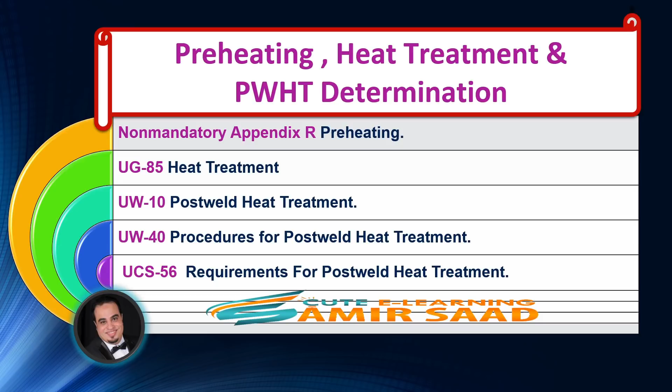In this lecture, we will discuss preheating, heat treatment, and PWHT determination as per the following referenced code paragraph: Non-mandatory Appendix R, Preheating.

Introduction. Preheating may be employed during welding to assist in completion of the welded joint. The need for and temperature of preheat are dependent on a number of factors, such as the chemical analysis, degree of restraint of the parts being joined, elevated physical properties, and heavy thicknesses.

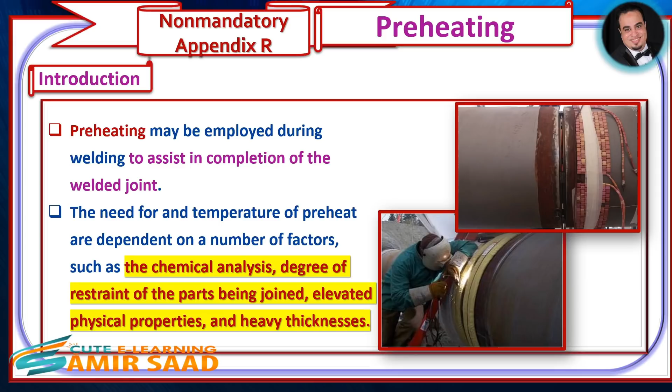Mandatory rules for preheating are, therefore, not given in ASME VIII Div.1, except as required in the general notes that provide for exemptions to post-weld heat treatment, in tables UCS 56.1 through UCS 56.11, and tables UHA 32.1 through UHA 32.7.

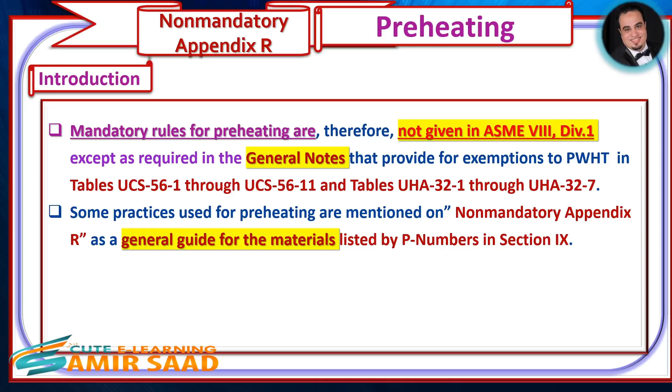Some practices used for preheating are mentioned in Non-Mandatory Appendix R, as a general guide for the materials listed by P numbers in Section 9.

The procedure specification for the material being welded specifies the minimum preheating requirements, under Section 9 Weld Procedure Qualification Requirements.

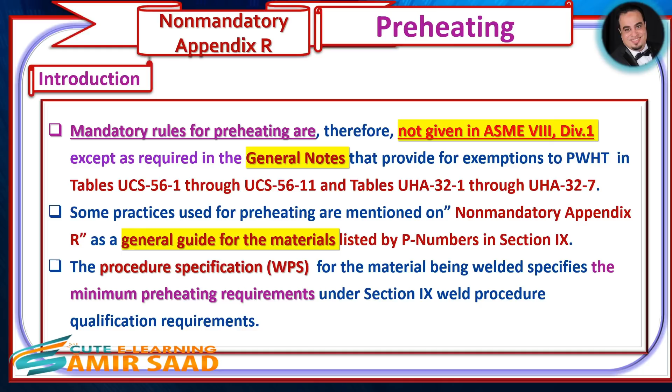The heat of welding may assist in maintaining preheat temperatures after the start of welding, and for inspection purposes, temperature checks can be made near the weld.

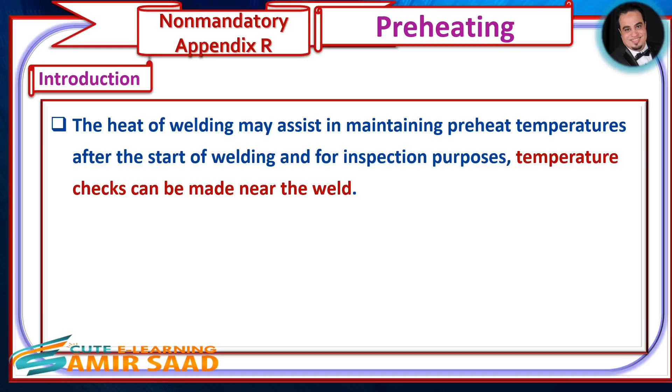Normally, when materials of two different P number groups are joined by welding, the preheat used will be that of the material with the higher preheat specified on the procedure specification.

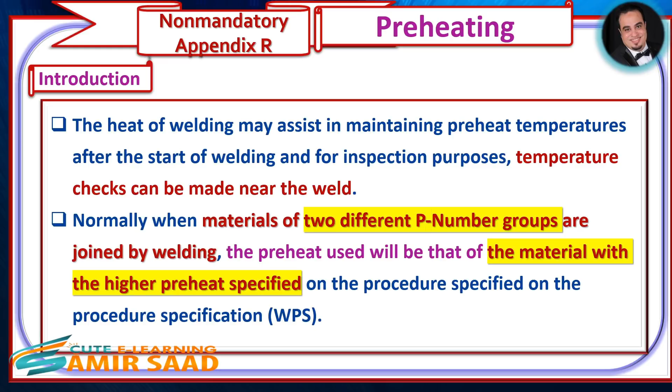The minimum preheat temperatures for materials of various P number groups, from P number 1 through P number 15E, are given as per Non-Mandatory Appendix R, Preheating.

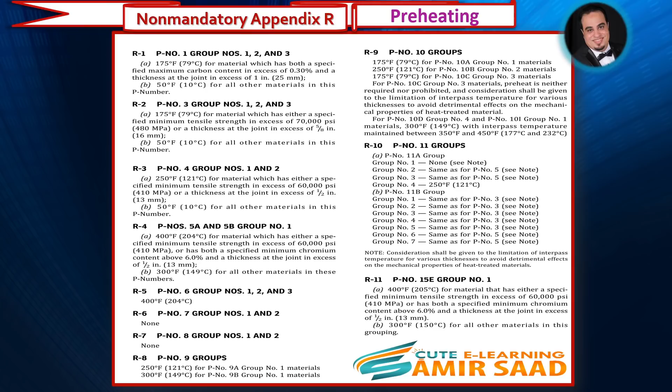Example 1. What is the recommended minimum preheating temperature in the construction of a new pressure vessel made from P number 1 Group 3 material that has a nominal thickness of 1.75 inches and carbon content of 0.35%?

Example 2. What is the recommended minimum preheating temperature in the construction of a new pressure vessel made from P number 9B Group number 1 material that has a nominal thickness of 0.5 inch?

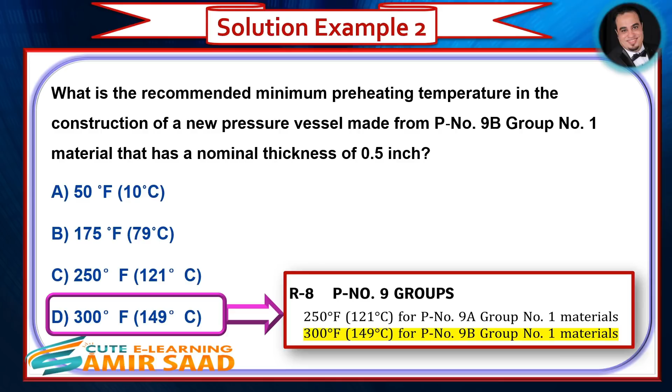UG85 Heat Treatment. When plate specification heat treatments are not performed by the material manufacturer, they shall be performed by, or be under the control of, the manufacturer, who shall then place the letter T following the letter G in the mill plate marking, to indicate that the heat treatments required by the material specification have been performed.

The manufacturer shall also document in accordance with UG 93B that the specified heat treatment has been performed. UCS 85, UHT 5E, and UHT 81 provide requirements for heat treatment of test specimens.

UW10 Post-weld heat treatment, PWHT. Pressure vessels and pressure vessel parts shall be post-weld heat treated as prescribed in UW40, when post-weld heat treatment is required in the applicable part of subsection C.

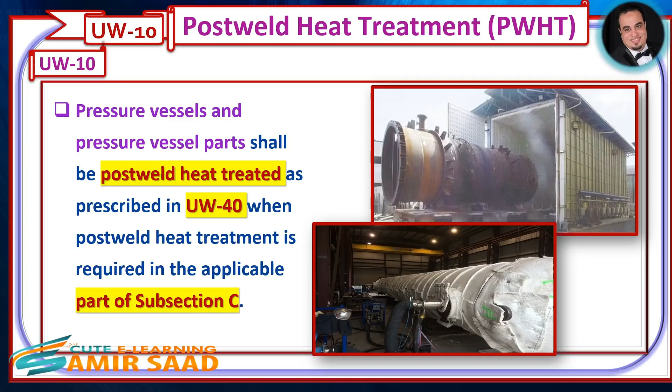UW40 Procedures for post-weld heat treatment. UW40A, PWHT soak band. As a minimum, the soak band shall contain the weld, heat-affected zone, and a portion of base metal adjacent to the weld being heat-treated.

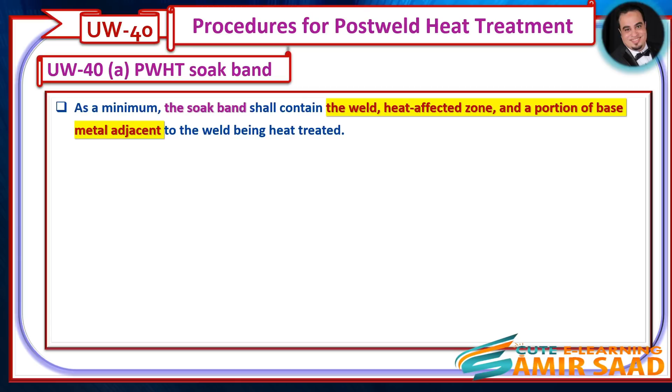The minimum width of soak band is the widest width of weld plus 1T or 2 inches, whichever is less, on each side or end of the weld, as illustrated in the below figure.

Please note that the term T equals the nominal thickness of the weld at the point of attachment, as per UW40, F.

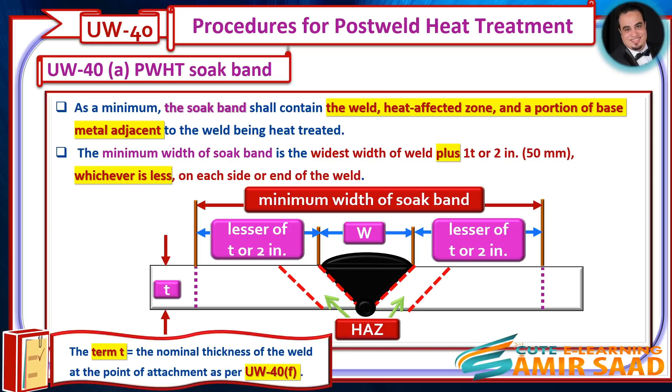Example: what is the total minimum width of a PWHT soak band in the construction of a new pressure vessel that has a nominal thickness of 1 inch, a maximum weld width of 0.5 inch, and made from P5A material?

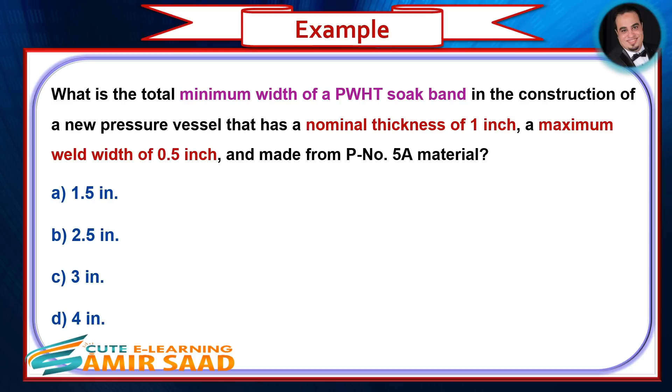Solution: the given information. Nominal thickness equals 1 inch, maximum weld width equals 0.5 inch. Task: minimum width of PWHT soak band.

Solution: the minimum width of soak band is the widest width of weld plus 1T or 2 inches, whichever is less, on each side or end of the weld. So, the answer is B, 2.5 inches.

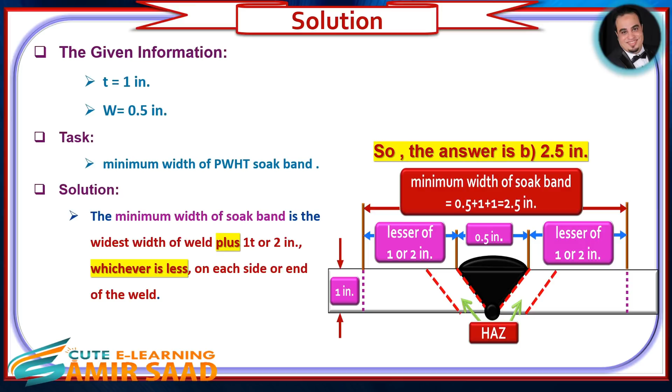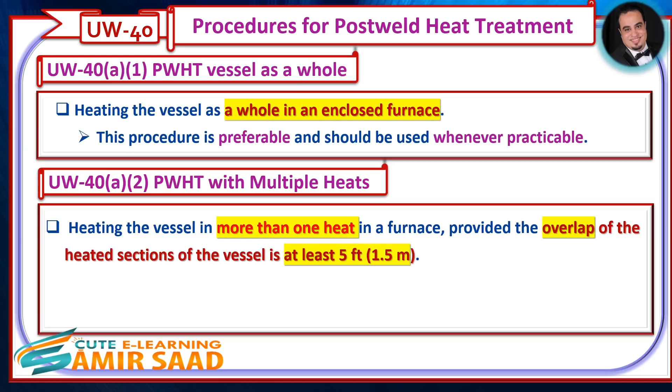UW40A2, PWHT with multiple heats: heating the vessel in more than one heat in a furnace, provided the overlap of the heated sections of the vessel is at least 5 feet. When this procedure is used, the portion outside of the furnace shall be shielded so that the temperature gradient is not harmful.

UW40F, the term nominal thickness. The term nominal thickness is used in tables UCS 56.1 through UCS 56.11, UHA 32.1 through UHA 32.7, and UHT 56, and is the thickness of the welded joint as defined below.

UW40F1. When the welded joint connects parts of the same thickness, using a full penetration butt weld, the nominal thickness is the total depth of the weld exclusive of any permitted weld reinforcement.

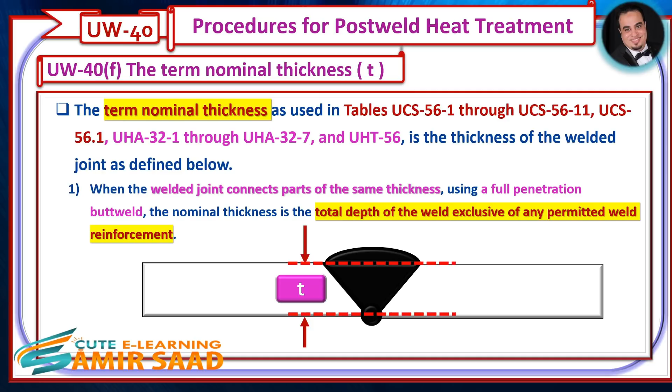UW40F2. For groove welds, the nominal thickness is the depth of the groove.

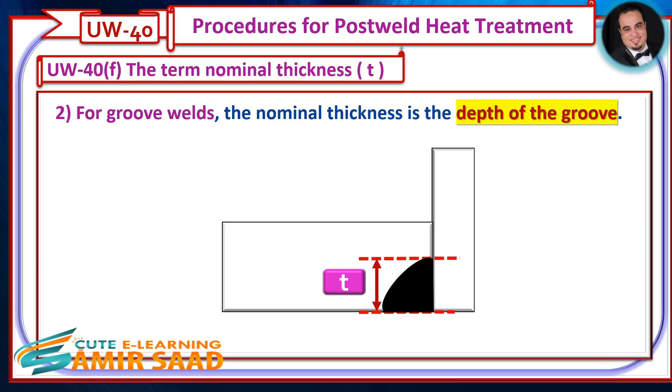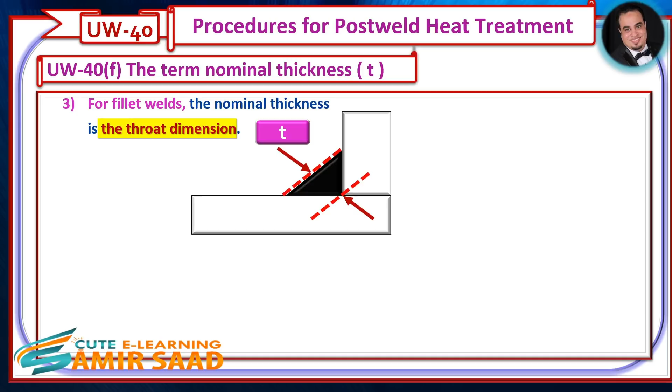UW40F3. For fillet welds, the nominal thickness is the throat dimension. If a fillet weld is used in conjunction with a groove weld, the nominal thickness is the depth of the groove, or the throat dimension, whichever is greater.

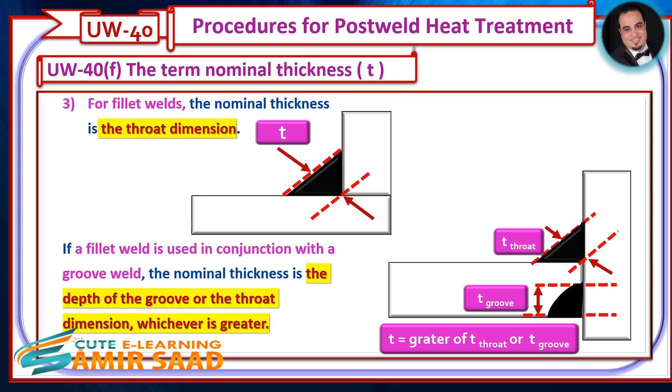UW40F5A. When a welded joint connects parts of unequal thicknesses, the nominal thickness is the thinner of two adjacent welded parts, including head-to-shell connections.

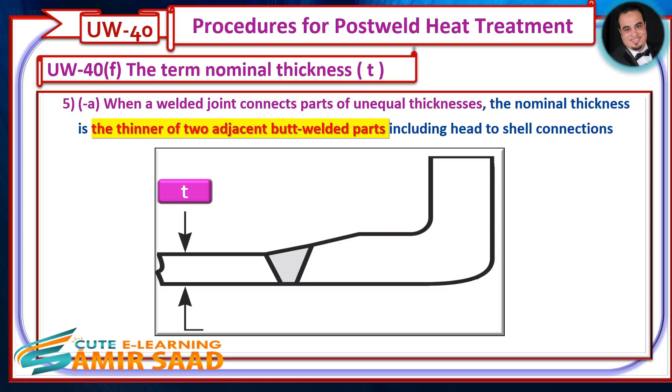UW40F6. For repairs, the nominal thickness is the depth of the repair weld.

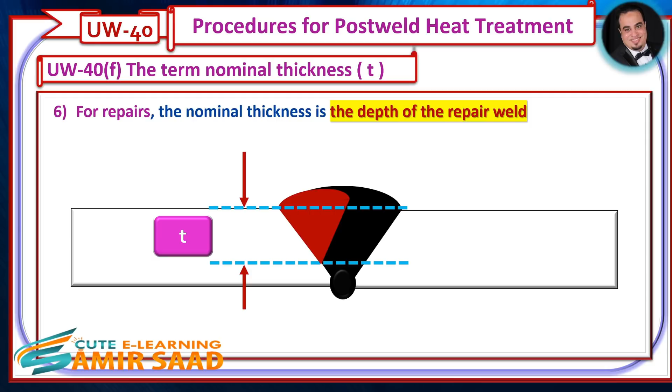UCS 56. Requirements for PWHT. As per UCS 56 D.1, the temperature of the furnace shall not exceed 800 degrees Fahrenheit at the time the vessel or part is placed in it.

Rate of heating shall be not more than 400 degrees Fahrenheit per hour, divided by the maximum metal thickness of the shell or head plate in inches, but in no case more than 400 degrees Fahrenheit per hour.

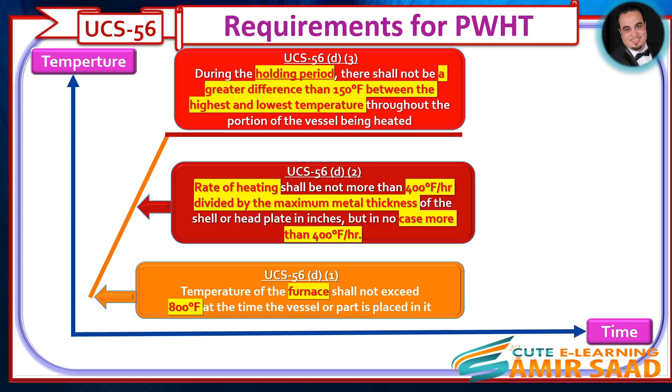As per UCS 56 D.3, during the holding period, there shall not be a greater difference than 150 degrees Fahrenheit between the highest and lowest temperature throughout the portion of the vessel being heated.

As per UCS 56 D.5, rate of cooling shall be not greater than 500 degrees Fahrenheit per hour, divided by the maximum metal thickness of the shell or head plate in inches, but in no case more than 500 degrees Fahrenheit per hour.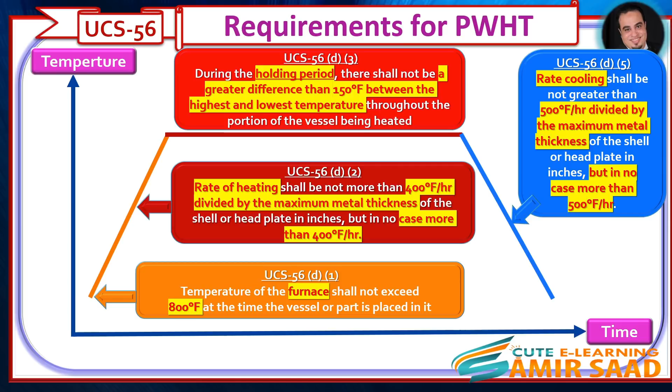From 800 degrees Fahrenheit, the vessel may be cooled in still air. As per EndNote 76, the rates of heating and cooling need not be less than 100 degrees Fahrenheit per hour.

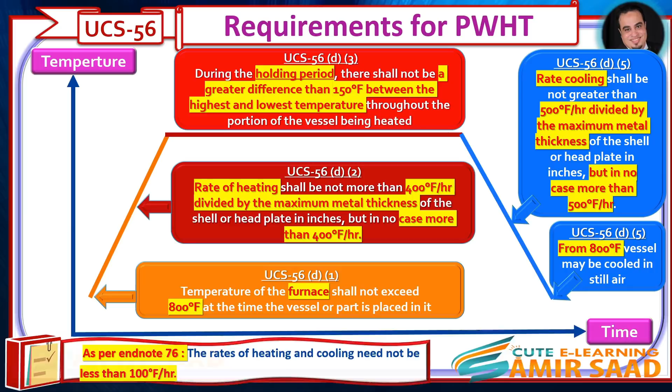During the heating period, there shall not be a greater variation in temperature throughout the portion of the vessel being heated than 250 degrees Fahrenheit, within any 15 feet interval, as illustrated in the figure below.

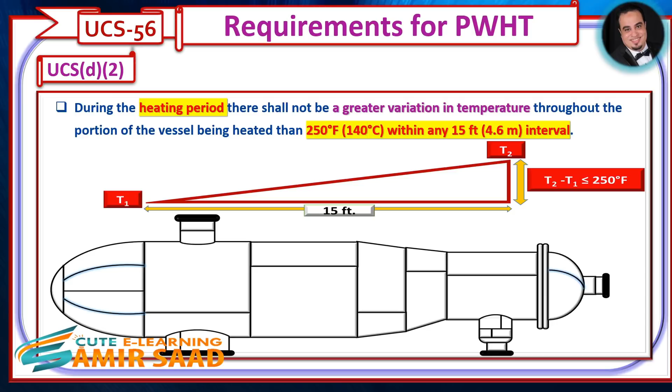Example 1. What is the maximum PWHT rate of heating, above 800 degrees Fahrenheit, when using the furnace heat treatment method and the maximum metal thickness is 2 inches?

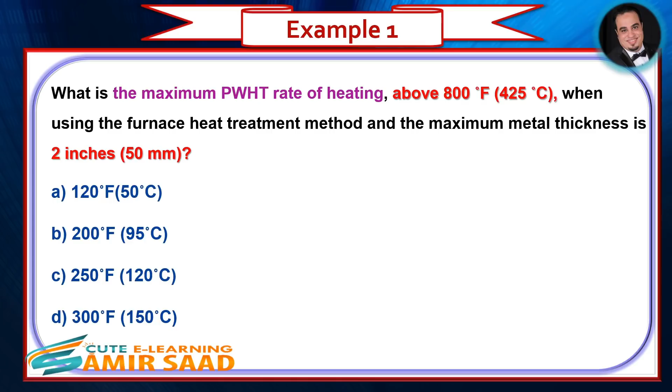Solution Example 1. The given information: maximum metal thickness equals 2 inches. Task: maximum PWHT rate of heating.

Solution. As per UCS 56 D.2, rate of heating shall be not more than 400 degrees Fahrenheit per hour divided by the maximum metal thickness of the shell or head plate in inches, but in no case more than 400 degrees Fahrenheit per hour. Rate of heating equals 400 divided by 2 inches equals 200 degrees Fahrenheit per hour. So, the answer is B, 200 degrees Fahrenheit.

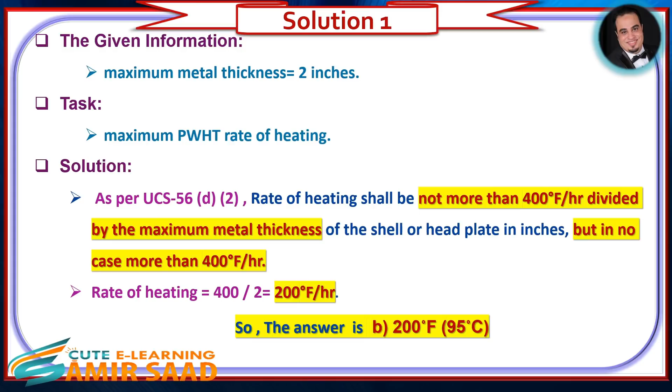Example 2. What is the PWHT rate of cooling, above 800 F, when using the furnace heat treatment method, and the maximum metal thickness is 1.25 inches.

Solution Example 2. The given information: maximum metal thickness equals 1.25 inches. Task: PWHT rate of cooling.

Solution. As per UCS 56 D5, rate of cooling shall be not greater than 500 degrees Fahrenheit per hour, divided by the maximum metal thickness of the shell or head plate in inches, but in no case more than 500 degrees Fahrenheit per hour. Rate of cooling equals 500 divided by 1.25 equals 400 degrees Fahrenheit per hour. So, the answer is D, 400 degrees Fahrenheit per hour.

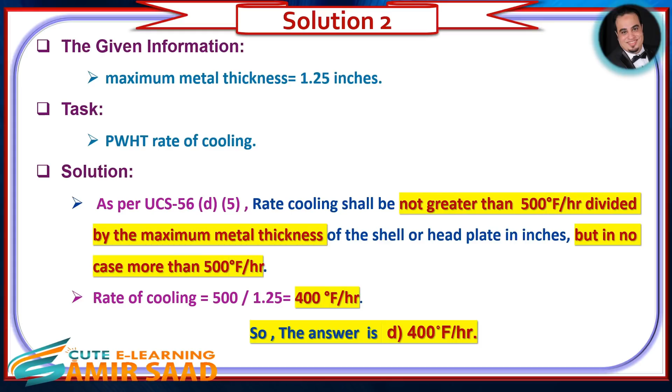UCS 56 and UHA 32. Requirements for PWHT. Table UCS 56-1 through UCS 56-11. PWHT requirements for carbon and low alloy steels include P number 1, 3, 4, 5A, 5B, and 5C, 9A, 9B, 10A, 10B, 10C, and 15E.

Table UCS 56.1. Alternative post-weld heat treatment requirements for carbon and low alloy steels. Table UHA 32.1 through UHA 32.7. Requirements for high alloy steels include P numbers 6, 7-8, 10H, 10I, 10K, and 45.

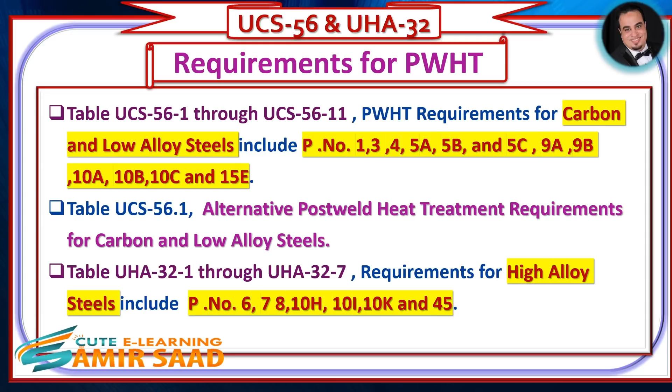Table UCS 56.1. Post-weld heat treatment requirements for carbon and low alloy steels, P number 1. As an example, how to determine post-weld heat treatment: to determine minimum normal holding temperature and minimum holding time, you must know nominal thickness per UW40F, and material P number and group number.

We will discuss the PWHT for nominal thickness 1/16 to 2 inches. Minimum holding time is 1 hour per inch, 15 minutes minimum.

Minimum holding time at normal temperature for nominal thickness 1/16 to 1/4 inch is 15 minutes. Minimum holding time at normal temperature for nominal thickness 1/2 inch is 30 minutes.

Minimum holding time at normal temperature for nominal thickness 3/4 inch is 45 minutes. For nominal thickness 1 inch, it is 1 hour.

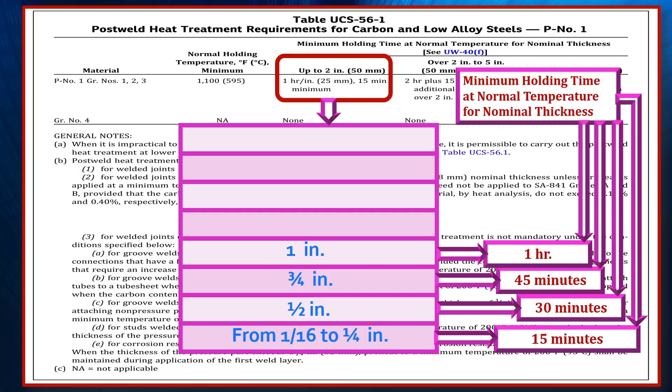Minimum holding time at normal temperature for nominal thickness over 1 1/4 inches, if no preheat applied, is 1 hour 15 minutes. For 1 1/2 inches, 1 hour 30 minutes. For 1 3/4 inches, 1 hour 45 minutes.

Minimum holding time at normal temperature for nominal thickness 2 inches is 2 hours.

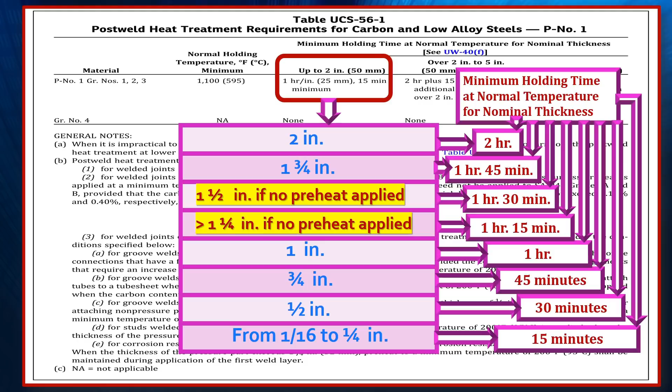Per General Notes B1, post-weld heat treatment is mandatory for welded joints over 1.5 inches nominal thickness.

Per UW2A, when vessels are to contain lethal substances and are fabricated of carbon or low alloy steel, such vessels shall be PWHT per Table UCS 56, unless otherwise exempted by General Note B3 of Table UCS 56-1.

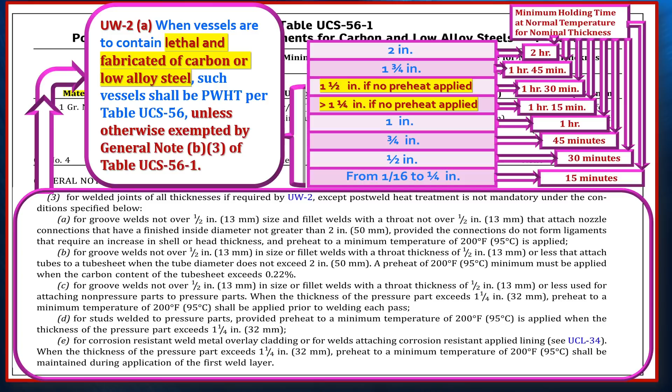Per General Notes B2, post-weld heat treatment is mandatory for welded joints over 1 1/4 inches nominal thickness through 1.5 inches nominal thickness, unless preheat is applied at a minimum temperature of 200 degrees Fahrenheit during welding.

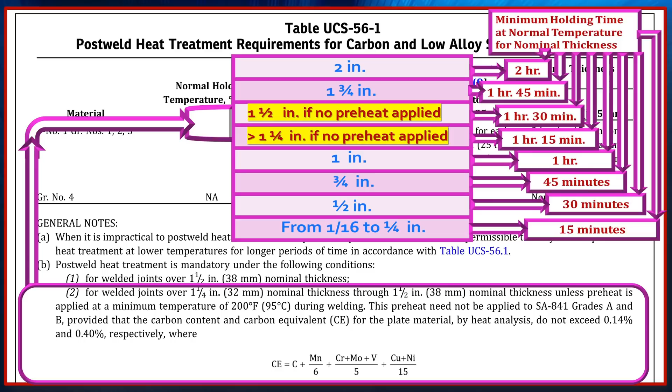Over 2 inches to 5 inches, the PWHT is held for 2 hours for the first 2 inches of thickness, with an additional 15 minutes per inch over 2 inches. Let's look at a graphic of this thickness range.

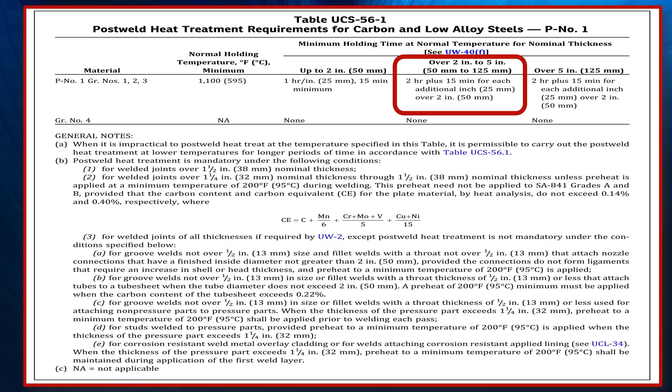Minimum holding time at normal temperature for nominal thickness of 2 inches is 2 hours. For nominal thickness of 3 inches, it is 2 hours 15 minutes.

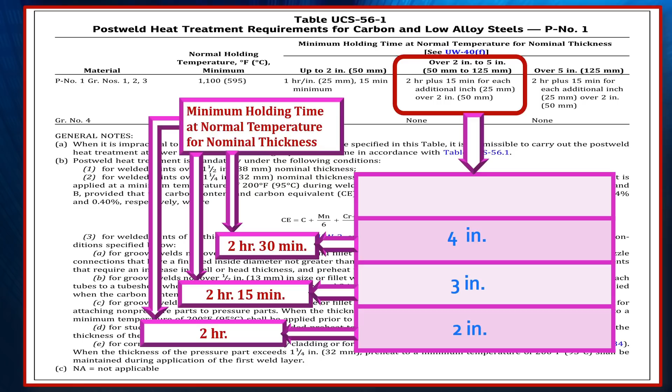For nominal thickness of 4 inches, the minimum holding time is 2 hours 30 minutes. For nominal thickness of 5 inches, it is 2 hours 45 minutes.

Example 1. A vessel is manufactured of SA 516 grade 70 material. What is the required PWHT holding temperature and minimum holding time at normal temperature for nominal thickness of 6 inches?

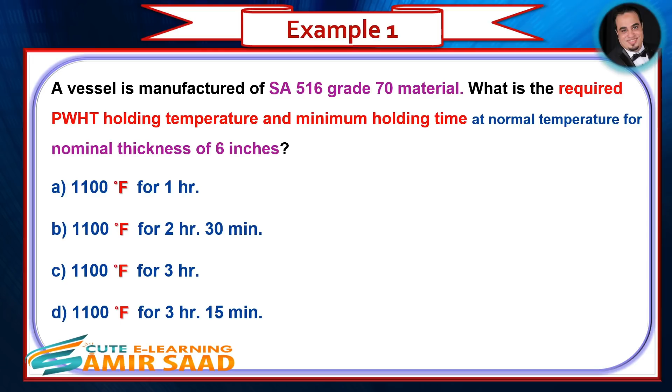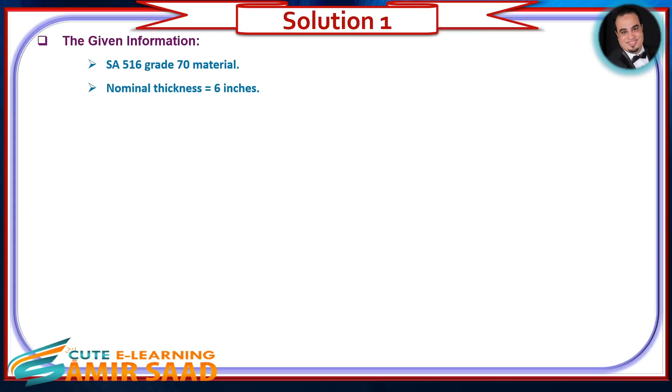Solution example 1. The given information: SA 516 grade 70 material, nominal thickness equals 6 inches. Task: determine the PWHT holding temperature and minimum holding time.

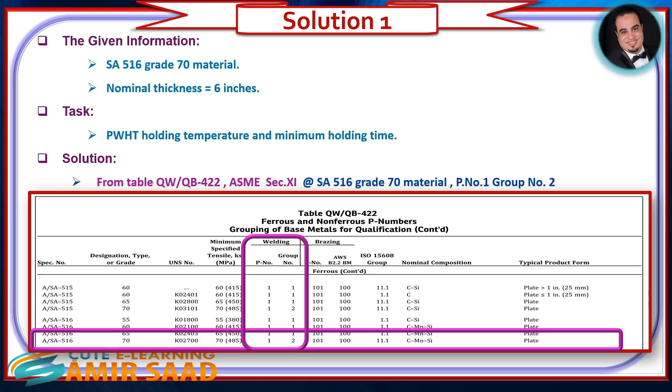From Table QWQB 422, ASME Section 9, SA 516 grade 70 material is P Number 1, Group Number 2. From Table UCS 56-1, for P number 1 at nominal thickness of 6 inches.

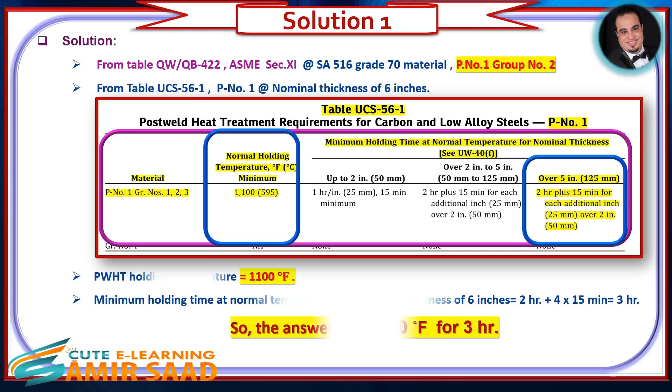PWHT holding temperature equals 1100 degrees Fahrenheit. Minimum holding time at normal temperature for nominal thickness of 6 inches equals 2 hours, plus 4 times 15 minutes, equals 3 hours. So the answer is C, 1100 degrees Fahrenheit for 3 hours.

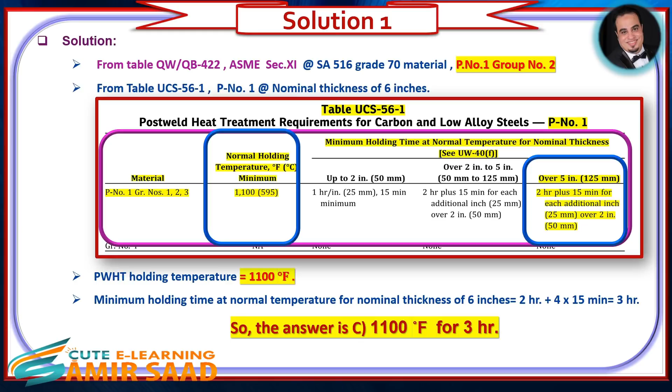Example 2. A vessel is manufactured of SA 335 grade P22 material. What is the required PWHT holding temperature and minimum holding time at normal temperature for nominal thickness of 6 inches?

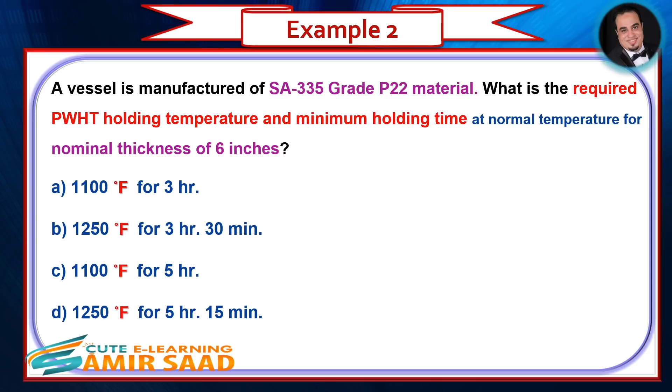Solution example 2. The given information: SA 335 grade P22 material, nominal thickness equals 6 inches. Task: PWHT holding temperature and minimum holding time.

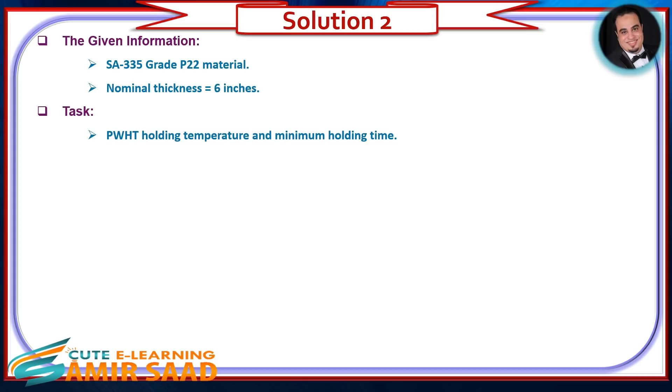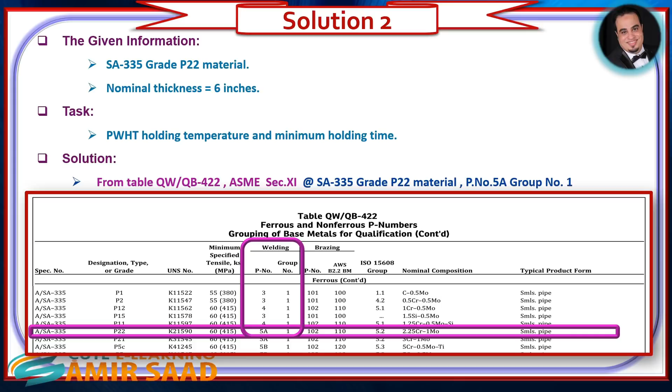Solution. From Table QWQB 422, ASME Section 9, SA 335 grade P22 material is P Number 5A, Group Number 1. From Table UCS 56-4, P number 5 at nominal thickness of 6 inches.

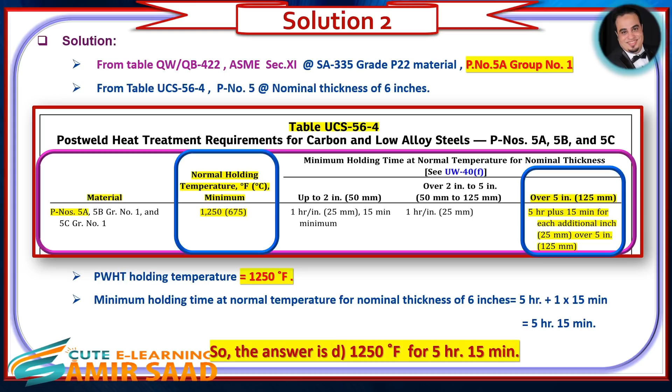PWHT holding temperature equals 1250 degrees Fahrenheit. Minimum holding time at normal temperature for nominal thickness of 6 inches equals 5 hours, plus 1 times 15 minutes, equals 5 hours 15 minutes. So the answer is D, 1250 degrees Fahrenheit for 5 hours 15 minutes.

Example 3. A vessel is manufactured of dissimilar materials, P number 1 and P number 5A. What is the required PWHT holding temperature and minimum holding time at normal temperature for nominal thickness of 6 inches?

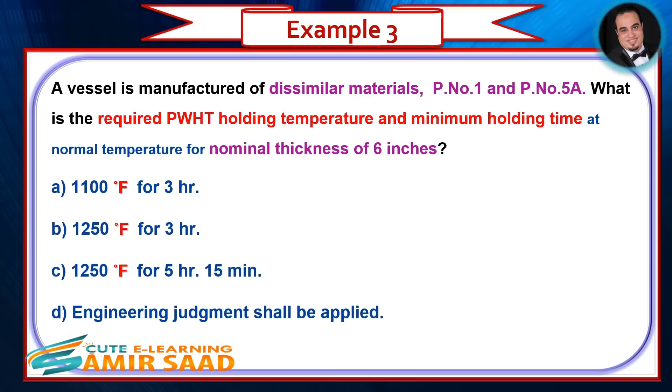Solution example 3. As per UCS 56C, when pressure parts of two different P number groups are joined by welding, engineering judgment shall be applied when selecting the post-weld heat treatment temperature and holding time to produce material properties suitable for the intended service. So the answer is D, engineering judgment shall be applied.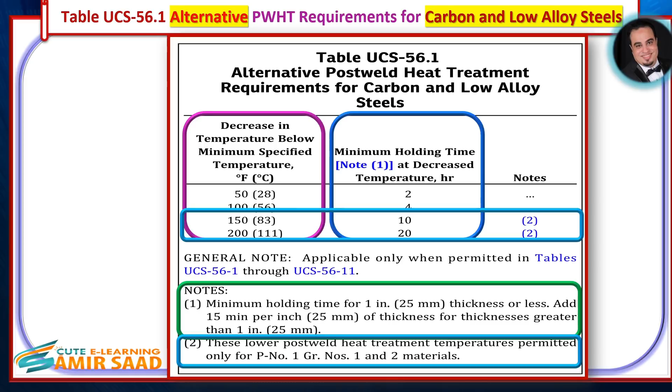Example 1. A pressure vessel is made of 4 inches thick P number 1 Group number 2 material. Enclosed in the vessel is an aluminum heat exchanger that cannot be heated over 1000 degrees Fahrenheit. It is permissible to perform the PWHT at 950 degrees Fahrenheit for...

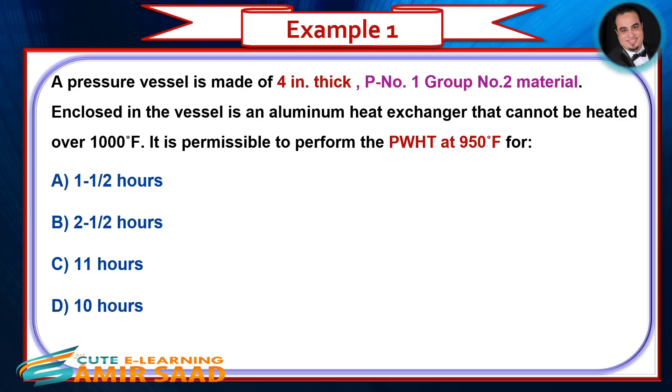Solution example 1. The given information: P number 1 Group number 2 material, thickness equals 4 inches. Task: the minimum PWHT holding time.

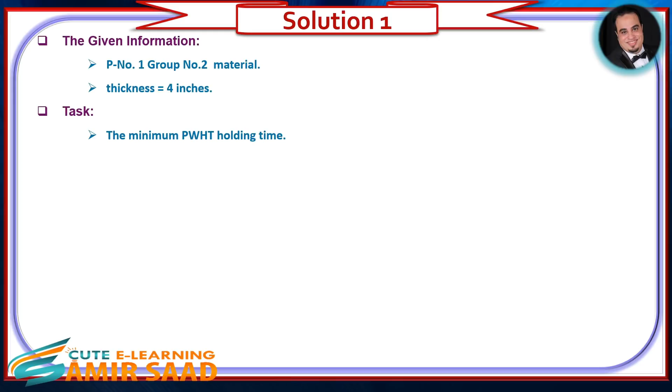Solution. The minimum holding temperature in Table UCS 56-1 is 1100 degrees Fahrenheit.

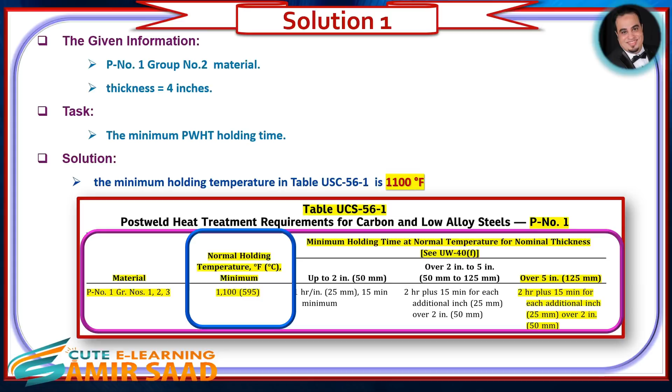Then the adjusted holding time equals 150 degrees Fahrenheit. From Table UCS 56.1, minimum holding time for this degree of 150 degrees Fahrenheit equals 10 hours plus 15 minutes for each 1 inch, which equals 11 hours. So the answer is C, 11 hours.

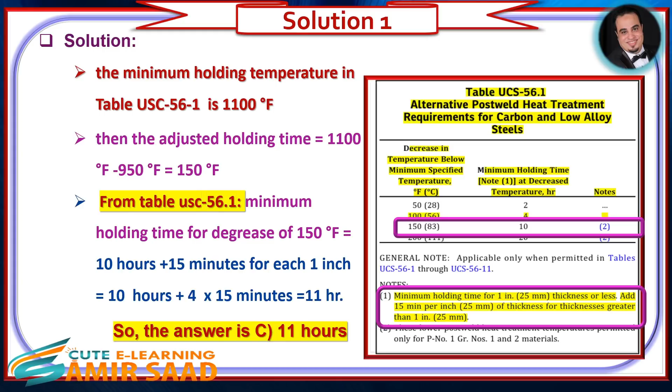Example 2. If PWHT will be reduced by 150 degrees Fahrenheit, what is the minimum PWHT holding time for a 4 inch thick nozzle attached to a pressure vessel made from material P number 1, Group 3? Solution: As per Note 2, these lower post-weld heat treatment temperatures are permitted only for P number 1, Group 1 and 2 materials. So the answer is the lower PWHT is not permitted.

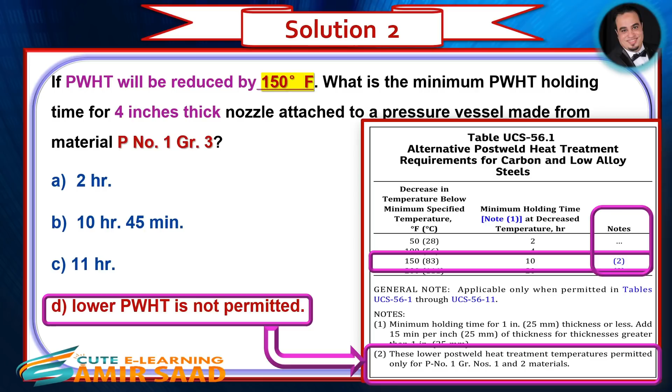UCS 56E. PWHT repaired area, except as permitted in UCS 56F. Repair to vessels that have been PWHT require the repaired area to be PWHT after welded repairs have been made.

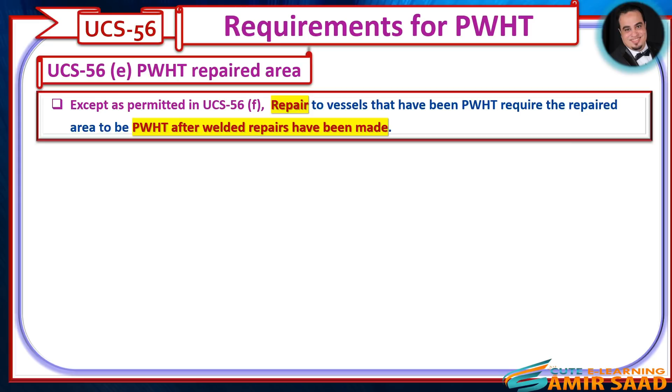UCS 56F. The exemptions for reheat treatment of repaired area are as follows: P number 1, Group numbers 1, 2, and 3 materials; P number 3, Group numbers 1, 2, and 3 materials; and the weld metals used to join the above materials. Provided the repair is made before the final hydrostatic test, and provided that PWHT is not required as a service requirement per UW2A or UCS 68, the exemptions in Tables UCS 56.1 through UCS 56.11 are to be applied. The welded repairs shall meet the requirements of UCS 56F1 through UCS 56F6.

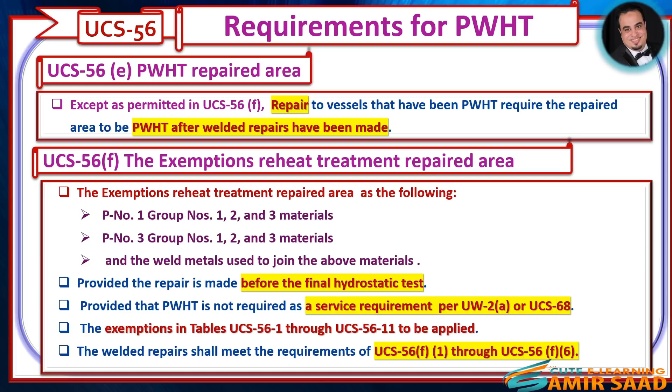Review questions. Question number 1. When it is necessary to post-weld heat treat a vessel in more than one heat due to length, which of the following is the minimum overlap of the heated section? Answer is C.

Question number 2. What is the total minimum width of PWHT soak band in the construction of a new pressure vessel that has a nominal thickness of 0.625 inch, a maximum weld width of 1.0 inch, and made from P number 5A material? Answer is B.

Question number 3. A section of vessel is being manufactured with SA 516 Grade 70 material that has a thickness of 2.75 inches. The minimum post-weld heat treatment holding time is. Answer is B.

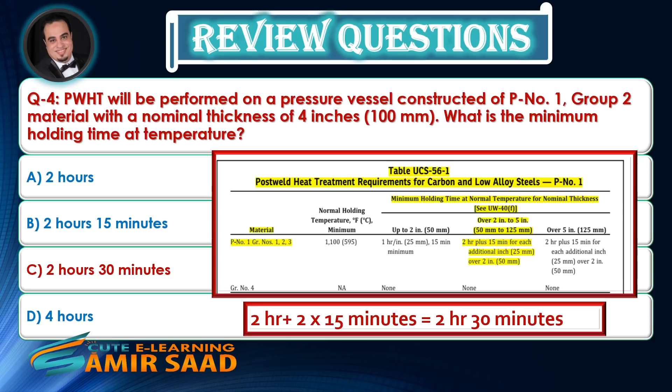Question number 5. When fabricating a pressure vessel of P number 1 materials, with a nominal thickness of 1.5 inches, post-weld heat treatment is required unless. Answer is A.

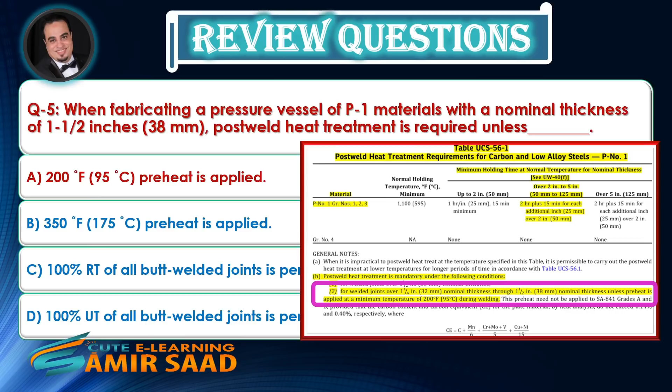Question number 6. Shell corroded material SA 302 Grade A, P number 3, needs to be repaired by overlay cladding. What is the maximum thickness that can be repaired without post-weld heat treatment? Answer is C.

Question number 7. When performing PWHT of a pressure vessel using the furnace method, what is the maximum temperature permitted at the time the work is placed in the furnace? Answer is D.

Question number 8. What is the maximum PWHT rate of heating above 800 degrees Fahrenheit, when using the furnace heat treatment method under the following conditions, and the maximum metal thickness is 1 inch? Answer is B.

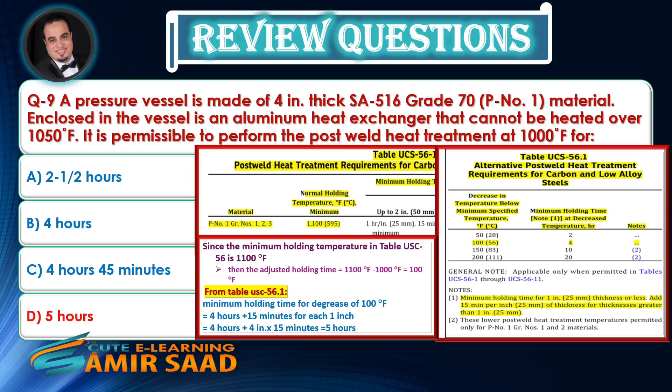Question number 10. When heat treatment is performed on a pressure vessel, PWHT temperature measurement is determined by. Answer is C.

Question number 11. What is the nominal thickness to be used in Table UCS 56, when joining 1.5 inches and 1 inch thick material by a full penetration butt weld? Answer is A.

Question number 12. During your review of PWHT procedure for a pressure vessel, what value of nominal thickness is applied to a welded joint, where a fillet weld is used in conjunction with a groove weld? Answer is C.